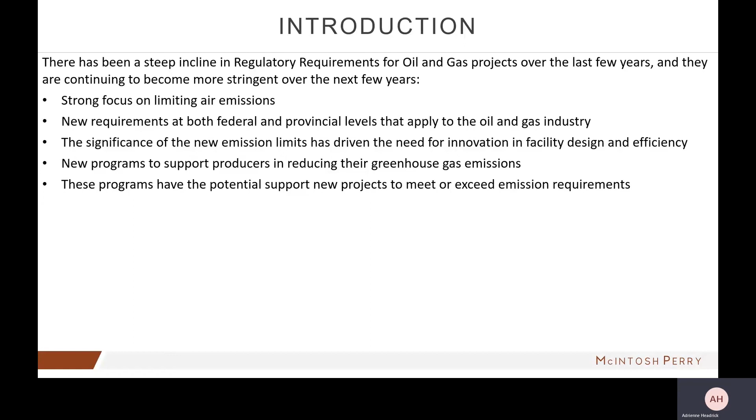These programs, I think, really open up the door to actually be able to move forward with some new projects at some of the facilities that are not currently in compliance with some of these limits, or maybe at facilities that you want to exceed some of those compliance criteria.

As far as air emission regulations go, I'm going to touch on 5 different regulations today. The majority of the focus will be on methane regulations and greenhouse gases and carbon programs, and that's because they do tie directly into the incentive programs that I'm going to chat about today.

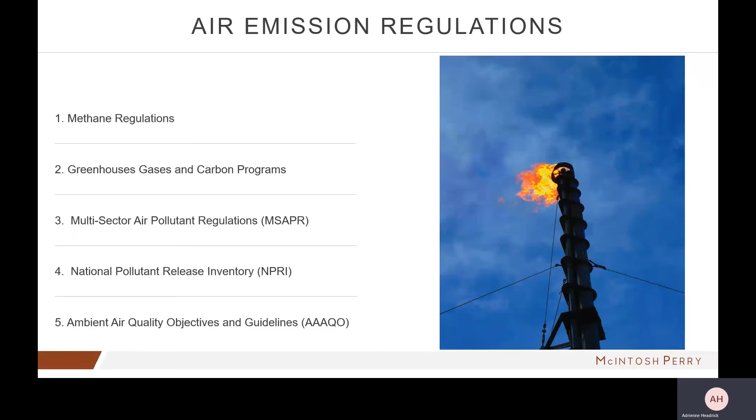The focus will be on Alberta, as that is also where the incentive programs that I'm talking about today apply to. I will quickly do an overview, though, on the multi-sector air pollutant regulations, the National Pollutant Release Inventory, and the ambient air quality objectives and guidelines as well.

As far as methane regulations go, our federal government committed Canada to reducing our methane emissions by 40 to 45% by 2025. So these were commitments that were made as a part of the Paris Agreement in December of 2015.

Methane is really being targeted because of its potency as a greenhouse gas. It's considered to be at least 25 times more potent than CO2. So really, you're getting better bang for your buck if you're able to reduce your methane emissions compared to most other emissions that are out there.

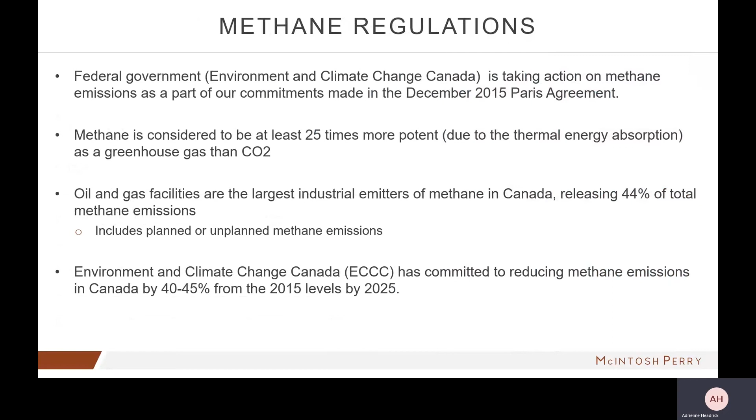The oil and gas facilities are being targeted because we are the largest emitter of methane within Canada, releasing 44% of total methane emissions.

Now, these are the regulations that have come out in recent years. At a federal level in 2018, they released their regulations on reducing the amount of methane that could be emitted from oil and gas facilities across Canada. Then over the last 18 months, Alberta, British Columbia, and Saskatchewan have all put a lot of time into creating their own regulations and their own methodologies for achieving that 45% reduction of methane emission limits.

So what Alberta, British Columbia, and Saskatchewan did was they took their suggested regulations to the federal government and asked them for equivalency. This process took quite a bit of time, but in the last few months, all 3 of those provinces were granted federal equivalency on methane regulations.

So that basically just means that when you're operating a facility now within Alberta, you follow the Alberta provincial requirements as opposed to the federal ones, and the same goes for BC and Saskatchewan. So within Alberta, you're looking at your Directive 60 and your Directive 17 are the 2 main documents where most of the new regulations are held.

In addition, the AER, as they usually do, has put out a lot of other manuals, guidance documents, videos, and tutorials to help with additional support on methane regulations.

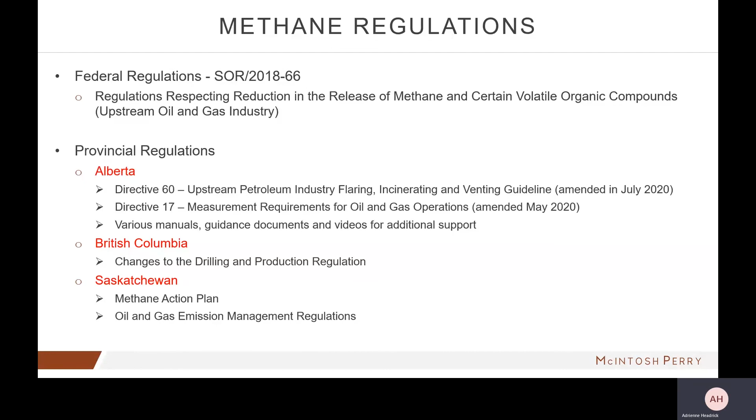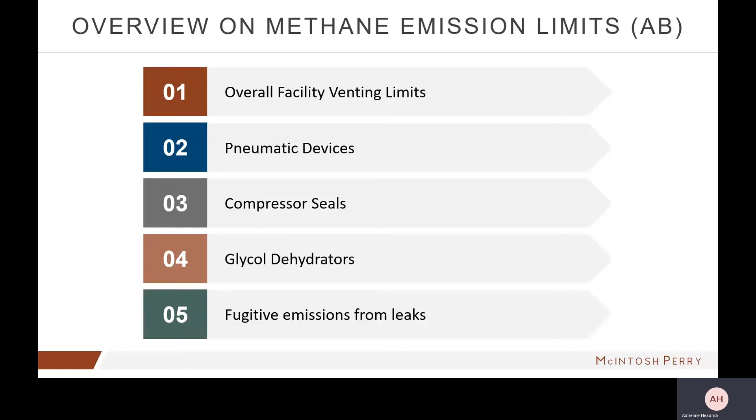But as I mentioned today, my focus will be on Alberta. So when we're looking at methane emission limits, the major areas targeted for reductions are overall facility venting limits, pneumatic devices, compressor seals, glycol dehydrators, and fugitive emissions. I'm going to go through each of those categories as a very high-level overview.

One thing I want to note is that this is just an overview, and there are lots of other nuances and exceptions and details that might be specific to facility type, owners, or operators. They should still be familiar with Directive 60 as well, but this is just an overview.

So when you're looking at your facility venting limits, the major thing I wanted to point out on this slide is that new facilities designed after, or that come into operation after, January 1st, 2022, actually have a significantly reduced methane limit compared to existing facilities. About one-fifth of the amount of methane is allowed to be released from new facilities constructed after January 1st, 2022. That's a fairly significant value.

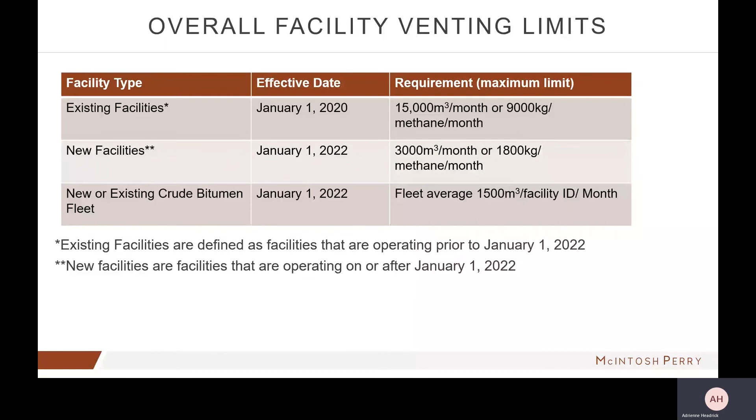It really just reiterates the creativity and innovation we need to apply to new facility designs going forward. When we're looking at pneumatics, the real goal of AER here is to move away from high bleed instruments that run off of natural gas. They're looking for conversion to electrification or instrument air to run pneumatic devices, and where that's not possible, like in remote locations, they're looking for you to switch from high bleed to low bleed instrumentation.

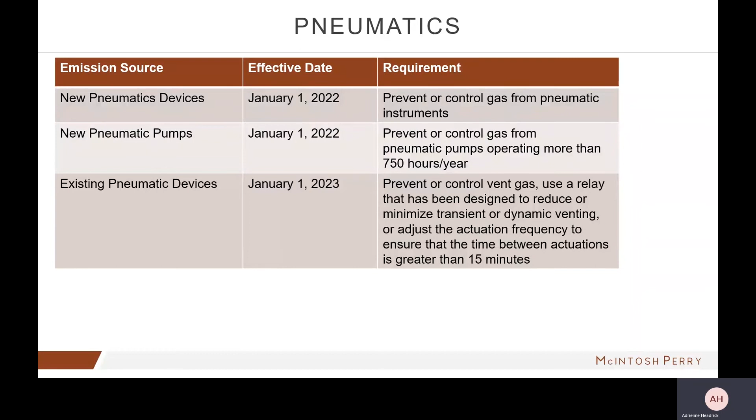When looking at compressor seals, they have set limits for the amount of methane you're able to vent from your reciprocating and centrifugal compressor seals.

An interesting thing to note for the limits here is that in 2019, I was able to take part in an assessment of thousands of compressors across North America. A lot of the data came from the EPA, so a lot was for the United States, but some was also out of Canada. It was an assessment of how long after you replace a compressor seal you'll be exceeding these regulatory limits. That assessment showed, and it's not a formal study, it was something done in-house,

that although most manufacturers recommend changing your compressor seals out after around 8 to 10 years, they're actually in non-compliance with these regulatory limits within about 2 or 3 years. That's a fairly significant finding, and I think that in general, replacing your compressor seals more often may prevent you from exceeding these limits.

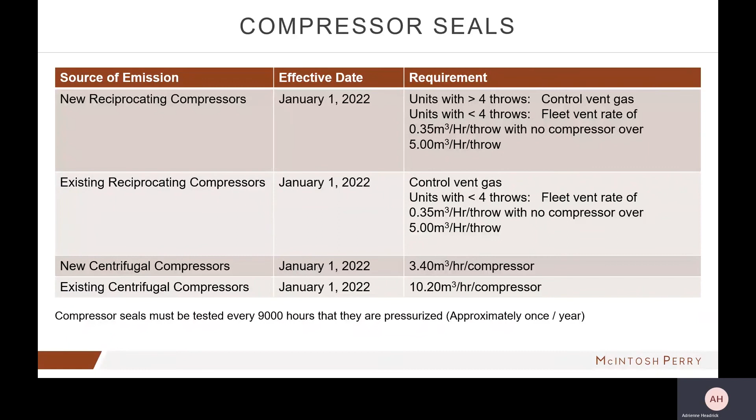But in cases where it's too expensive or onerous to switch out those compressor seals, there are some other options available for capturing that vented gas as well. And there's some things in the works on redesigning compressors as well.

When it comes to glycol dehydrators and fugitive emissions, your glycol dehydrators now also have a methane limit per unit per day, and this is completely new. I think everybody's used to dealing with benzene when it comes to glycol dehydrators, but now we also have to look at methane. As of January 1st, 2022, those limits will be in place, with a different limit for existing versus new glycol dehydrators.

Now, when we're looking at fugitive emissions, I know this is an area that was fairly new to a lot of owners and operators. Some people had some extent of a fugitive emission plan in place, but it was never prescriptive, and it never had to follow a certain regulatory protocol.

Well, now going forward, actually starting earlier this year, January 1st, well sites all require annual screenings for fugitive emissions, and other facilities require 1 to 3 fugitive emission surveys per year. The frequency relates to the facility category type as per Directive 56. Once you find a leak, an owner has 30 days to repair it. There are quite a few exceptions when it comes to that timeline, but that's the timeline noted within Directive 60.

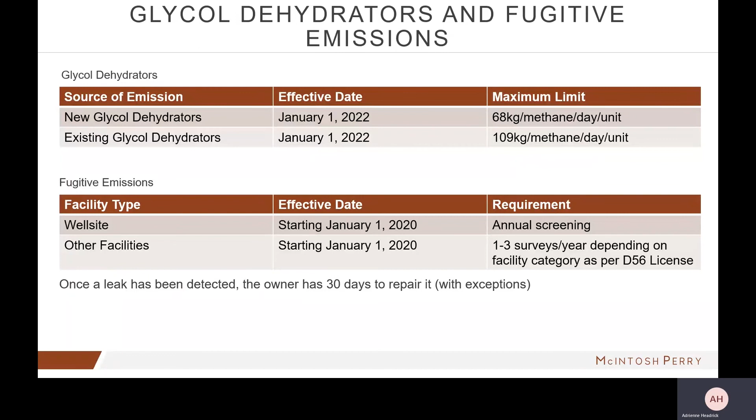Now, it's one thing to have all of these limits in place, but a lot of people automatically like to ask, well, how is the AER going to know if we're meeting them or not? And how strict are they going to be, and how are they going to enforce?

So there is annual methane reporting that has been started. The first annual report would have been submitted on January 1st, 2020, and that's both through One Stop, which is an AER online application system, as well as through Petrinex, where methane emissions tie into the production accounting side of things.

In addition to reporting on the actual emission values—and those numbers that I showed you on the last 5 slides are the same areas that you'd be reporting on an annual basis—2 plans were also required to be submitted to the AER.

One was your methane reduction and retrofit compliance plan, meant to be a detailed plan looking at all of a company's assets and determining whether they were or weren't in compliance, or maybe not sure yet, and a plan for how they were going to bring those sites into compliance, where retrofits would happen, and what the schedule and budget would look like over the next few years.

In addition to that plan, there was also a fugitive emission management plan, which outlined the company's budget and resources for how they were going to get all of their required fugitive emission surveys done each year.

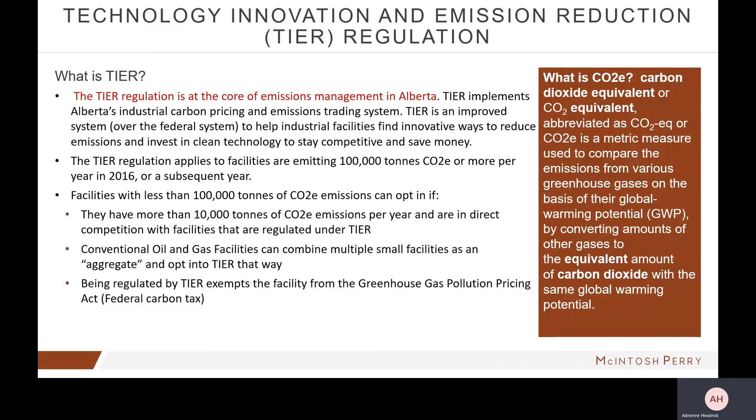And really, being regulated by TIER, why would you want to be? Some people ask, who opts into regulations? Well, the reason you'd want to be regulated by TIER is because it exempts you from the Greenhouse Gas Pollution Pricing Act, which is basically your federal carbon tax. So you're paying more of a provincial system, as opposed to paying the federal carbon tax, if you use this system.

So how do you become compliant under TIER? What does that look like? Emission reduction obligations are determined for facilities according to a benchmark approach. This can either be a facility-specific benchmark, where several years of data for a specific facility are used to calculate what a benchmark would look like, or you can use high-performance benchmarks for that facility type in general.

So, for example, if you had 10 natural gas plants with similar output, you could calculate what a performance benchmark would be for a natural gas plant. The operators are able to choose the less stringent of the two approaches for their facilities to determine what benchmark they want to try to achieve.

And those benchmarks are tightening annually by 1% beginning in 2020. What you're really looking at is the benchmark is an allowable amount of emissions, or a threshold for the amount of emissions you're allowed to emit from a facility.

Facilities that emit less than their benchmark are able to sell performance credits through TIER or on the Alberta carbon offset market. Now, if you exceed your benchmark for that facility, there's a few different things you can do to become compliant with TIER.

One option is that you can work to reduce your emissions on site, which is really the overall goal of this program. But until you're able to get there, it might take years for some facilities, so you can use emission performance credits generated through the TIER program.

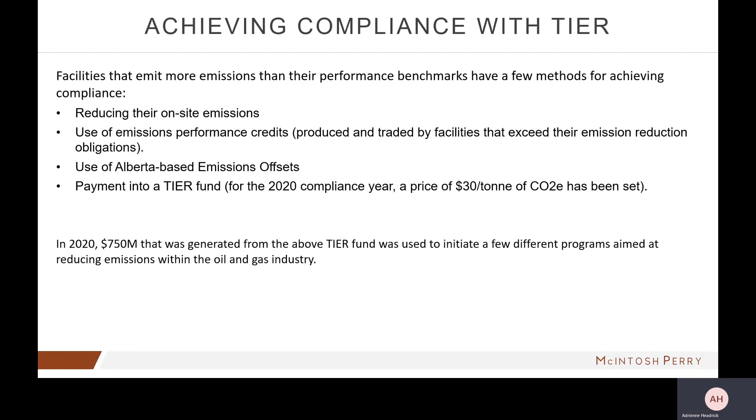Some of the additional regulations that I mentioned I'd touch on but not get into detail on are on this slide. So your multi-sector air pollutant regulations are basically a set of standards that reduce the amount of NOx emissions that can be emitted from boilers, heaters, and engines at oil and gas facilities.

The NOx emission standards are going to get tighter and tighter, starting in 2021 and going all the way up to 2036. And then there's also the National Pollutant Release Inventory.

This is just an inventory where we have to report federally any substances on their list that we emit from our facilities. There's a prescribed list of substances that may pose a risk to human health or the environment, and those get reported federally each year.

And then there's also the Alberta Ambient Air Quality Objectives. This is a provincial set of objectives where air modeling or screening is required to determine if a facility meets or achieves these objectives.

Some of the common substances on that list that we see at our facilities would be SO2, H2S, carbon monoxide, NO2, and benzene. There are others that sometimes come up as well.

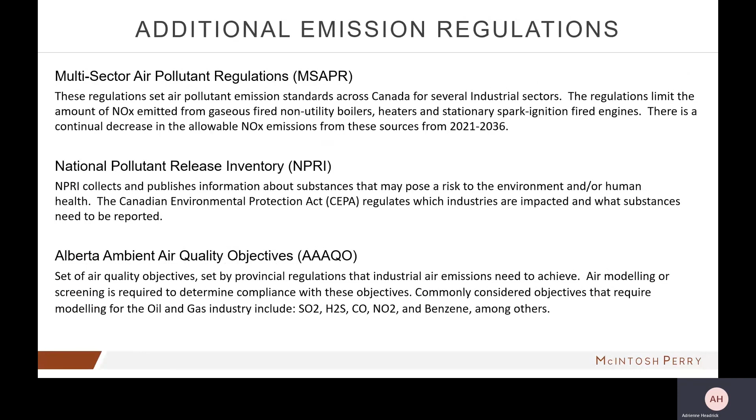Again, I'm not going to touch too much on these regulations. I really think they have enough detail that they'll probably require future presentations or information sessions. So I'm going to move on to talk a little bit about the incentive programs that tie into the carbon and methane regulations I just discussed.

So the first program is the Industrial Energy Efficiency and Carbon Capture, Utilization and Storage Program. Nice long acronym there, as if we don't need more of those in the regulatory world, but this is an $80 million grant program that proponents can potentially access if they want to utilize new technology to reduce emissions at their facility. This is run directly by Alberta Environment and Parks.

It was a really fast turnaround for this incentive program - it was only released a few weeks ago, and the deadline for application is October 30th, 2020, so that's coming up really fast. If you haven't heard about this program yet, maybe there were some projects you had already considered applying new technology to, or undertaking some projects that would reduce emissions at a facility, and now you want to pick those back up and see if they might qualify for this grant program in the next little while.

So, obviously in the next week here. The grant covers up to 75% of a project cost to implement an emission reducing technology.

And the project costs, what's considered a project cost, is actually a fairly inclusive list. It includes salaries, construction costs, equipment costs, among others. There's a pretty detailed list on what you can include in that.

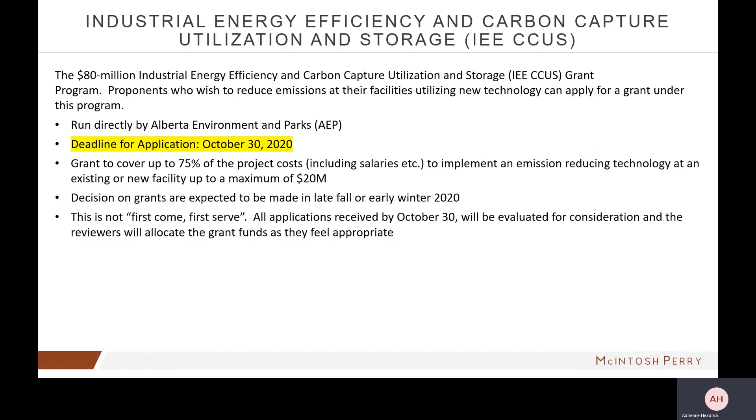All applications received by October 30th will be evaluated based on the same criteria. There are 5 areas of criteria that applications will be evaluated against, and anyone who meets all of the evaluation criteria will get a portion of the funds, up to 75% of the project costs.

The eligibility for this program is really aimed at tier regulated facilities, or facilities eligible to be tier regulated. Aggregated facilities under tier can apply, but only emissions from stationary fuel combustion devices are considered, since those are the emissions regulated under tier for those types of facilities. This is really aimed at your bigger facilities, but conventional oil and gas facilities could potentially apply if they're an aggregate under the tier program.

There isn't a minimum or maximum project cost for this one. And as I mentioned, only emissions that are regulated under tier are eligible to be considered in your application.

One of the commitments you have to make when applying for this program is that you're committing to paying the remaining 25% of the project costs, whether internally or through other external funding. Part of the application requires a letter signed by an executive within the company stating that there is that 25% budget planned for this project within the next year.

You also have to meet a couple other clauses here in regulations. I'll have a link available to you guys, so I won't go over those, but for the most part, most emission reducing technology that's been proven is accepted for the sake of this grant program.

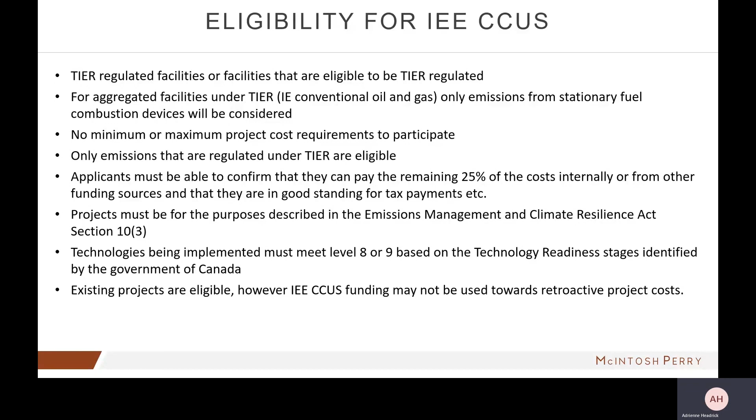Existing projects are eligible as well. However, you can't use any of the funding towards retroactive project costs. So if you're halfway through implementing a project with significant emission reduction, you can potentially claim up to 75% of the cost you still have to incur for that project.

Now, another program that's out there, also released just a couple weeks ago, is the Methane Technology Implementation Program, or MTIP. This program is aimed, again, at any technologies being added to facilities to reduce their methane emissions. A fund of $25 million has been allocated to this program, and it's implemented through Carbon Connect International, already open for applications. The application process does seem fairly straightforward so far.

Funding is going to be allocated for this one on a first come, first served basis. So instead of having a definitive end date, it's basically until their money runs out. There is a maximum incentive of $1 million per owner or operator.

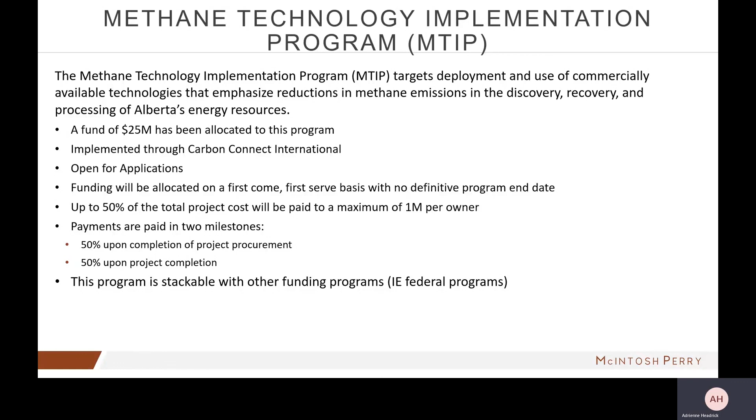Payments are paid in 2 milestones: 50% is paid upon project procurement completion, through proof of receipts of purchasing equipment, and then another 50% upon project completion. This program is stackable with other programs. We'll chat coming up here on the federal program that's coming out, but this would be stackable with the federal program to cover up to 100% of project costs.

Now, eligibility under MTIP is that the projects do have to be retrofits. So even if you're using new technology at a new facility, that's not eligible under this program, it has to be changes to existing facilities. Existing facilities have to be located within Alberta and have to be regulated by Directive 60, falling under the requirements of Section 8 of Directive 60.

You have to actually have the right to make the changes you're proposing at the facility. This program is really aimed at facilities that are not large emitters, so facilities regulated under tier aren't eligible for this program because there's the other grant program available for those. This is really aimed at smaller to medium-sized facilities, and the facilities can be a part of an aggregate under tier, so that's something to note.

If you are choosing to accept this funding, you are forfeiting the right to generate and sell your carbon offsets as well. So it is one or the other with this project. You can't generate the revenue from selling carbon in addition to this program.

The eligible project types under this program are listed here. They give you some examples of project types. Just because your project isn't on this list doesn't mean it's not eligible. It just means you have to do an extra step to request confirmation that it could be eligible. So there is a process for that as well.

In addition to these two projects, there are two other incentive programs expected to have more details released very soon. I actually heard one of them might be having more details released in the very near future, but one of them is the Baseline Reduction Opportunity Assessment.

This is a smaller fund, $10 million. But the point of this fund is to support smaller and medium-sized operators to conduct detailed assessments, to see where there are opportunities within their assets to reduce methane. Sometimes that might involve emission calculations, an engineering study, or field measurements. This gives them the opportunity to see where they stand with regards to compliance, and then some support and options on methane reduction.

And then one that I know a lot of people are waiting on right now is this Federal Emission Reduction Fund. This is a large fund of $750 million, and we are expecting an announcement late fall to early winter for how this program will work. It's also supposed to be focused on methane emission reduction for the oil and gas industry. So I think a lot of people are waiting to hear how that incentive program will be run.

Just to summarize the presentation, I want to say there are lots of ways that McIntosh Perry can help you achieve compliance with your facilities and access some of this incentive funding that's available right now. We can support you in understanding the new regulations and how they impact your assets, as well as what's still coming up. We try to stay on top of all the regulatory bodies and any hint or suggestion of new regulations coming up.